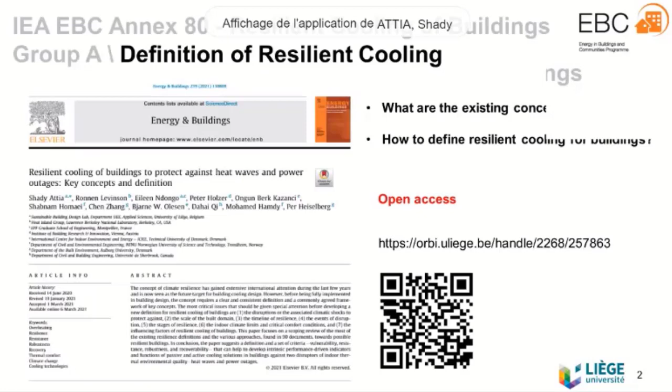My name is Shady Attia, and this work is not representing myself. It's actually representing a team, and literally it was a team. It's a collection of different ideas and thoughts, and a lot of effort to come up with a definition that caters for us as building professionals, regardless of the specialization. So in this context, we have several authors collaborated within the IEA context, and we wanted to have a definition for resilient cooling.

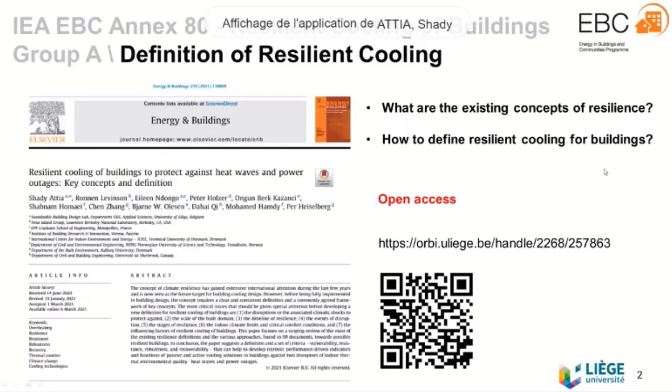But when we look at the building engineering field in general, almost you cannot find a definition for resilience because the scale of buildings is too small in regard to the concept, because the concept of resilience has a relation with a scale which is related to a big impact of a disruption. So this was the first question. The second question was how to define resilient cooling for buildings.

So in this context, the methodology that we developed was based on consulting the literature found on the international scene. And as you can see, there are not many active countries working on resilience in Europe. We are lucky because even though we complain about climate change, we cannot compare the situation with other more sensitive countries like Chile, the west of the United States, or North America in general, Australia, and if you remember the fires, the different droughts, the earthquakes, and so on.

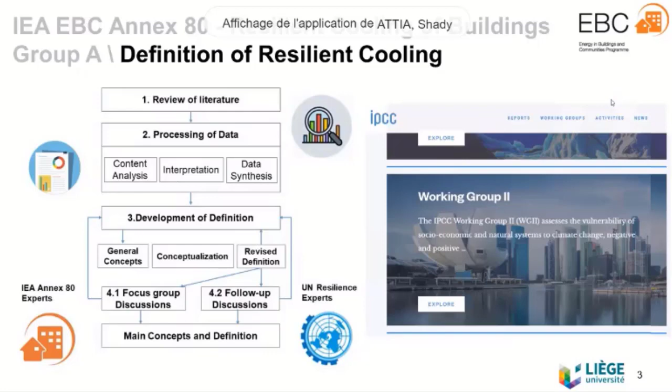So we opted to expand our research, and we looked at the United Nations publications, and we got in contact with the experts of the UN resilience task forces. Also, we looked at the IPCC work group on vulnerability, and also we checked all IEA previous publications and the United States Green Building Council and the RELi rating system. So this was the overall literature.

When we look at the summary, when we look at the new IPCC report, this is a sneak preview for the new IPCC report that will be published most probably the last quarter of 2021. There is a new definition of the different climate change scenarios. And as you can see, there is a different characterization of the different disruptions that might impact some regions across the world. And one of the most underestimated disruptions are fires.

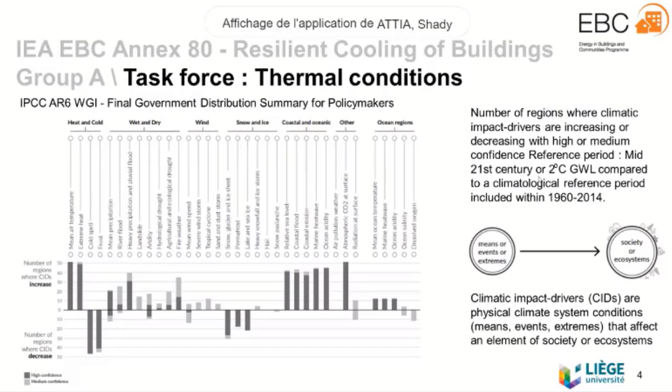And this would be the threat number one in Europe in association with drought. For sure, overheating is another threat, but as you can see in this graph, there is a series of different disruptions. So it was very difficult for us to define resilience without making sure, okay, what is the disruption we are talking about? Because at the end of the day, resilience is a response to a disruption. So this was the first glimpse that helped us to define our scope more sharply.

And definitely we learned from this paper that we must define the disruption, and we must define the scale of the disruption and the time of the disruption if we want to define resilience. Because resilience, in our context, would be a vague term. And what we are trying to present in this paper is one of the first or earliest concepts or proof of concept. So this is not a definitive work or a conclusive work or a comprehensive work. It is one of the thoughts that we are throwing in the lake of ideas.

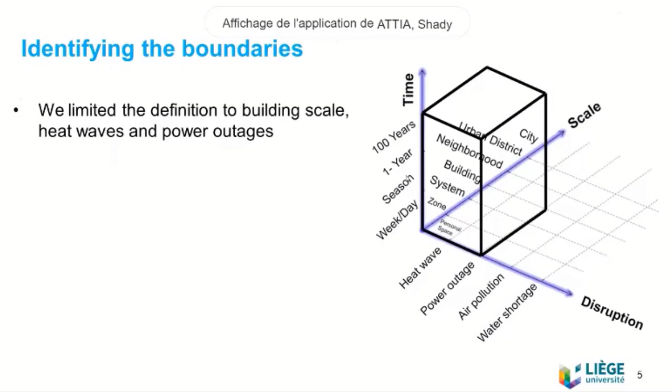So it's important to take the message also like this is not like a final or a one-shot work. So one of the most important factors when we started to characterize resilience, we discovered that there are 4 features that are very important, and they are very strongly associated with any risk factor related to overheating in buildings or power outages. It's mainly the vulnerability of the building, which means the sensitivity of the building even prior to the shock to be exposed to overheating problems and thermal discomfort issues.

The second important factor was the resistance. So how can the existing building, including the existing HVAC system, whether the building is free running or mechanically conditioned, how long can the building resist the phenomena? In this case, the phenomena will be overheating or a heat wave.

And then the third aspect would be the robustness, because this was a very difficult term. Robustness has to do with getting a series of continuous shocks until you fail. And then it shows how you recover back from the failure, actually. So therefore, we had this term of robustness and recoverability. And as you can see in the graph, we discovered that those are four main concepts or sub-concepts that must be associated with the term resilience. Otherwise, it would be very difficult to distinguish the terms resistance and robustness.

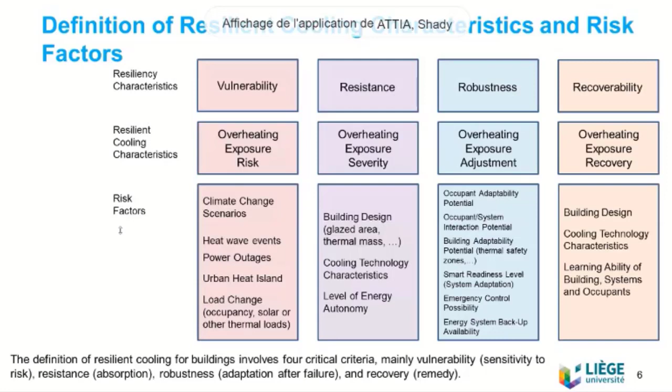So the definition of resilient cooling of buildings involves those four criteria, mainly vulnerability or sensitivity to risk, resistance or the absorption of the shock, robustness, which is the adaptation after failure, and here we need to see the flexibility and the plan Bs or the contingency plans, and finally the recovery in the sense of period and remedy and the curve of recovery. So these are the four factors that help us to come up with an overall definition or view on what happens with a building to define it as resilient.

And once we witness failures in the performance, such as a power outage, the cooling system is not delivering anymore, any shutdown in the system, any reduction or failure of comfort conditions beyond the tolerated or legal thresholds of performance, then we enter the third phase of robustness, where we witness a failure. Once the building is exposed to this shock and failed, then we can start to measure how it can recover back. And those four stages or phases that a building will go through, including its occupants and its equipment, will define its resilience.

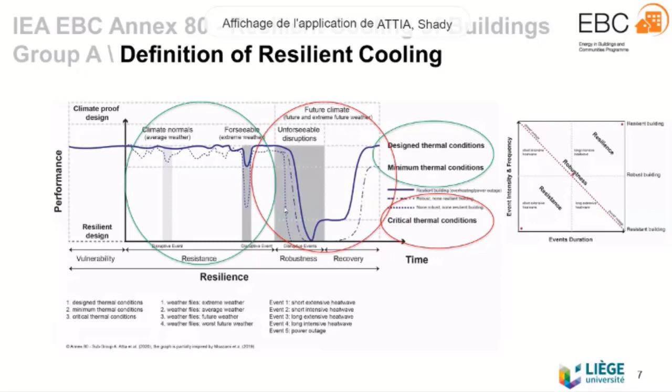Maybe now, why did we decide to focus on power outage and overheating? Like Peter was saying, this was a decision made by consensus. We were in the year of Corona. Some people pushed us to put Corona as a disruption. It can be, and it is a disruption, but in this case, we are talking about air quality. But any example you want to take, you can apply it to this case.

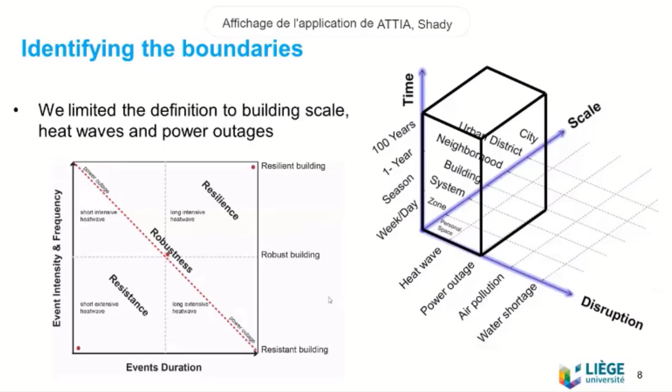It can be Corona, COVID, air contamination. It can be a fire outbreak. It can be an earthquake, whatever. So in our case, we focused on overheating and power outage, and we found those are the most relevant to our Annex 80. Now, some final words, because the time is running, and I want to respect the 10 minutes given to me, and maybe if you have any interaction.

In conclusion, we must not forget that the difference between the term resilience and resistance and robustness has to do with the exposure to shock and the failure. If a building fails, and after that it recovers back, then we can call it a resilient building. But if the building does not fail, it will remain under the realm or the definition of resistance and robustness.

So this is very important to take into account, that failure is a must to call something resilient, and this ability to bounce back. Any definition of resilience must be based on the identification of the specific shock or the disruption that it needs to be resilient against. And designers must specify and distinguish the resistance and robustness conditions against heat waves and power outage events. So the resistance period involves the building's ability to resist the shock with the same pre-shock operation conditions. And this was also tough to define.

Number 3, resilient cooling design is an urgent requirement for future-proof buildings, and weather extremes must be anticipated to assure well-being. So if we are assuming that we can label a building as a resilient design building according to RELi, the United States Green Building Council's rating system, we must already have this anticipation aspect, and the vulnerability has to be assessed in advance, and the recoverability should be also measurable and embedded in the design process and in the performance and the key performance indicators associated with the building.